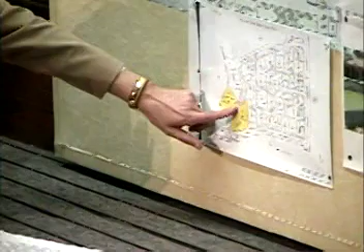Madam Chairman and respected members of the commission, I basically need to point out to you the property. It's kind of interesting, this portion of Camino, there's actually a wash here. This was supposed to be, at one time, a connected roadway, Camino Monte, circling around, Camino Descanso, both exiting on Palm Canyon Drive.

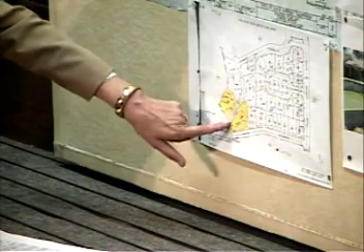But in 1972, that portion over the wash was determined as not buildable, so consequently it was vacated. The applicant is requesting vacation of Camino Monte, the portion right to his property line. That is at 2005 Camino Monte. Basically that is the request, and staff has determined that it is consistent with the general plan since it's not a portion of the circulation element.

Thank you. Any comments from the commission? So there are no other properties that take access from this? He's going to merge these two lots and the street in the middle, and it's not a street anyway.

Yes, the only properties that take access to this property are either properties that Mr. Westman owns or Mr. Ely owns, and they're working together on an overall development plan. The city also takes access across this property for some hillside properties that we own, and we have an easement. The vacation of the right-of-way will not vacate the easement to the public properties, and before we approve the actual vacation, we will require that easements to all the properties be in place so there's no confusion in the future. But no other properties take access, and we've in fact previously vacated a portion of Camino Monte, the part that goes over the wash. We figured that's a pretty tough bridge to build, long time ago.

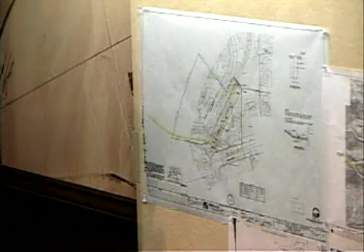So consequently, the applicant has done a surveyed trail. It's an actual metes and bounds description and a legal description that has been forwarded to the city attorney for review. And the city will base our approval upon, as a condition of approval included in your exhibit, at the approval of the city attorney.

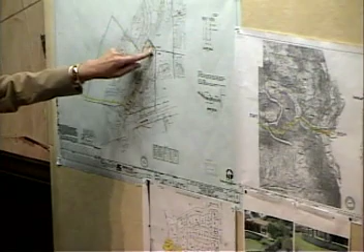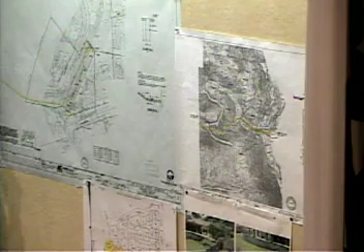This yellow line, this map, is kind of a blow-up of just a small portion of this map. The yellow represents the trail as it proceeds from Camino Monte down into the wash, proceeds up the wash, and then up the hillside, cutting across. You can kind of almost see it follows drainage pattern until it finally accesses the Lykken Trail, the trail that's already built. One portion of the request was that we would have 2 access points.

Currently, we really don't have that. There's only people walking up the road. So consequently, now we're asking that, and this has been determined as the point of access, where there would be some type of trail built down into the wash from Camino Descanso to intercept this trail so there could be access from both points.

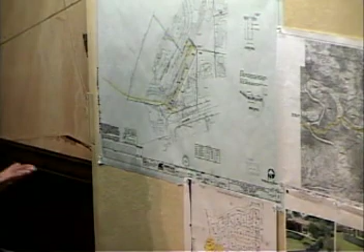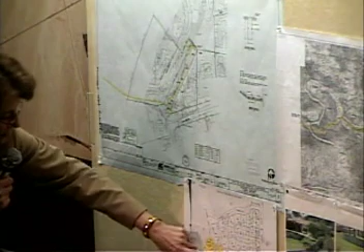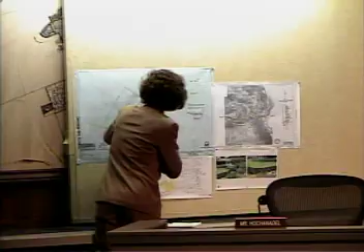Now, another component of this project that is actually the application is to build a retaining wall between 2 adjacent properties, these 2. They both, this is slightly deceptive, they extend, the property line is this solid black line here. And this is Camino Descanso property, Camino Monte property, both owned by the applicant.

There's been a boundary line adjustment to basically move the one property line a little further northwest to allow for a cleaner line here and the trail easement, etc.

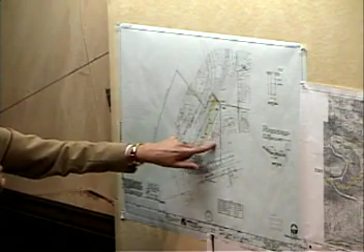The retaining wall request is to provide a fill for a potential development of this lot. That would be the intent. And the adjacent property has done something very similar, right here. I provided this photo exhibit just to clarify what I'm talking about.

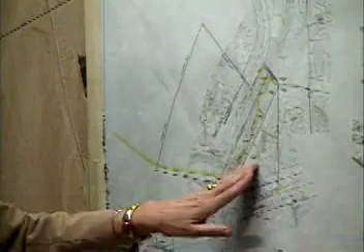This particular property has a non-conforming illegal structure here that's actually in the wash, which would be determined unsafe if there was an actual flood circumstance. So there's an intent to the retaining wall, and it works with the trail easement, the vacation, and the boundary line adjustment.

I've had inquiries from all the neighbors. There's been courtesy letters sent several times regarding this project. The first was sent last May, and then one about a month ago again. I believe a couple of neighbors are here that we've met on site to discuss the actual project, so we could get an idea in the field exactly how this will work.

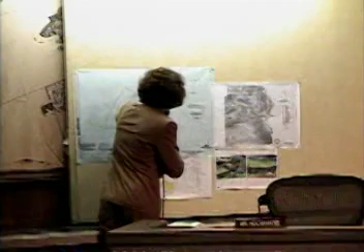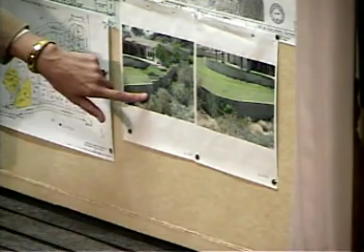The adjacent property owner here was very concerned about the impact to his wall, the aesthetics of the potential fill here, and the structural impact on his wall. The applicant has agreed to lower the proposed wall height by 2 feet where it's actually going to intersect.

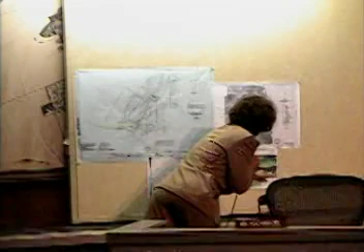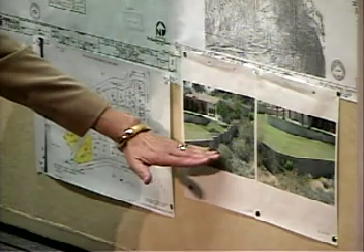It would be like proceeding from what we're seeing here. That would make a nice, clean, adjacent wall, doing basically the same kind of step-up design that's already there. We feel it will also be necessary to maintain the same elevation as far as fill, in order to not create an unstable relationship with a wall that wasn't designed for that.

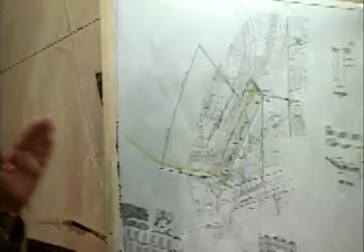Other concerns have come from this property owner, who was definitely concerned about the narrowing of the channel, and what that means hydrologically. We're narrowing a channel, so we're going to have swifter water and not necessarily enough... well, the applicant has a hydrology study that was conducted on behalf of the city.

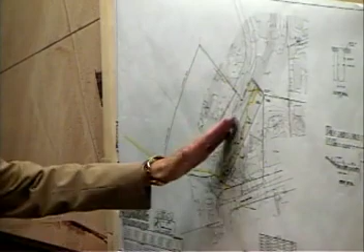That study has indicated a riprap would be necessary on the north and west side of the channel to protect it, and that also acts as a slowing mechanism when you do have a water current through there. Then the water would pool here, and it was determined by that professional review that the impact to any downflow properties was negligible. So staff has relied upon that professional opinion.

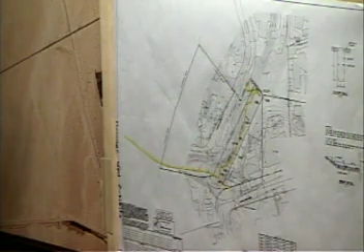I think there's one more neighbor. This particular neighbor does have concerns with the access and people parking, etc. How are they going to handle that, what's going to happen there? Right now, it's kind of like a little unimproved trail.

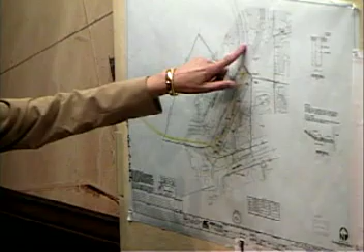People just scooch down the side of the wash if they want to walk from the adjacent neighborhood and go down, but most of the traffic comes up this way. There's enough right-of-way, and in talking with this neighbor, there's not much concern regarding a few vehicles parked in the right-of-way there. So that's something to think about, and we'll see if someone here wants to speak to that concern.

I think that concludes my report, and I certainly welcome any of your questions.

Thank you. Any commission comments? Yeah, I know. Okay. Yes.

If I could just make a couple of comments on the conditions of approval, just taking a look at them. Condition number 9, we'd like to change the last word from city attorney to city council. The council will have to approve that agreement. The city attorney will review it, but the council actually approves that type of document.

And then number 10, I think we need to also add to that, and say that condition deals with trail construction preceding the wall construction. We'd also be concerned that the trail be constructed prior to the final vacation of the roadway, so that the trail's in place and we don't end up with a period of time where there's no trail or public access through that area.

Okay, thank you. And those types of details we can work out in the trail construction agreement. So these just set the stage for actually how we memorialize it, and then how the council would actually approve the agreement. I see that the applicant is in the audience.

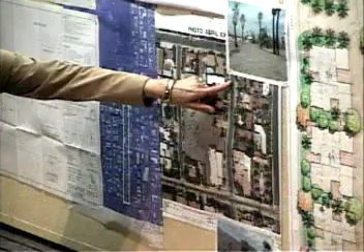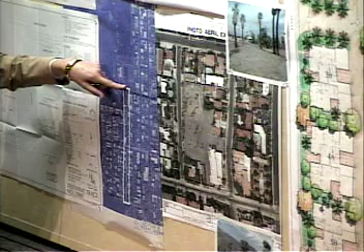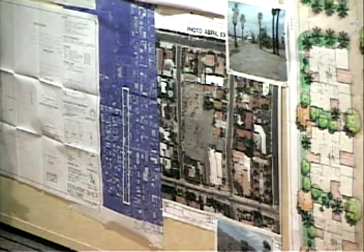The existing right-of-way, or existing roadway, is a collector status roadway on the circulation element of our general plan. That basically represents a street section that we've provided as an exhibit with a 60-foot wide right-of-way. The city maintains 60 feet of that area. If you so choose to amend that general plan circulation element and delete that designation of a collector, it would change the roadway status to a local roadway. That represents a 50-foot wide right-of-way that the city maintains.

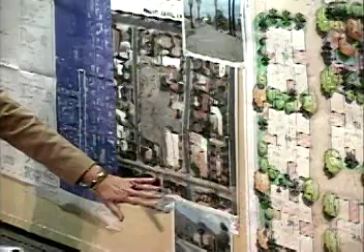This particular roadway is kind of well defined. I wish I had this for the entire length that we're proposing, because it certainly gives you the true idea of how this street actually exists. There's bay parking, there's some sidewalk, sometimes there's not a sidewalk. It's a very eclectic neighborhood in that respect. It's a historic neighborhood. Most of the structures have been there for quite some time. There has been infill development that has occurred.

But basically, I've detailed it in the staff report exactly block by block how this proceeds, but hopefully that would give you kind of a general overview of the roadway.

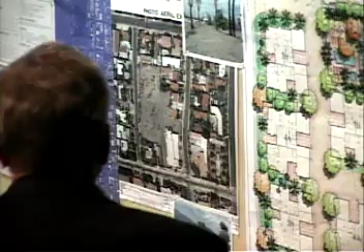We have received a letter from the Historic Neighborhood Association that was included with your documents on the table today, since it came in after the staff report was sent out to you. It includes the entire Historic Neighborhood Association's support for this general plan amendment. I think it would be best if I just addressed your questions now, but first a very brief overview.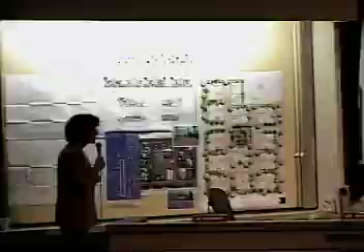Kathy, what's the actual width of the roadway as it exists? It's a mishmash, I know. Right now there's 40 feet on Cahuilla, I think I included that. Off the top of my head, I honestly can't tell you for the other blocks, but I know it's included here.

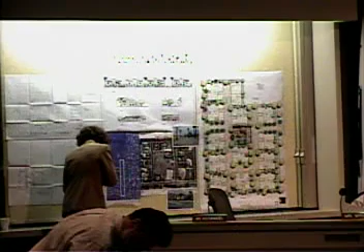South from Tahquitz Canyon Road, there's an existing right-of-way of 50 feet, and it indicates a 60-foot right-of-way road width, so it exists at 50. Then going down to Cahuilla Road and south to Baristo, it's a 66-foot right-of-way, but we know from the plan that there's basically about a 50-foot right-of-way and 40 feet approximately of pavement, probably a little bit more. As we proceed further south, there's a reduced half-street width on the west side of Cahuilla Road from Monte Vista south. So it's 66 feet, then it narrows slightly on one side of the road on this block — you can almost see it if you look at the old aerial. So that's a quick overview.

I guess the reality, though, is that for most of the length of that, it doesn't meet the actual condition as a collector street anyway. No, okay, that's exactly true.

In the proposal, are there any traffic calming provisions included? Because right now that's like the secondary thoroughfare as people move north to south across that side of town. If I could answer that question, the traffic calming program is done by Dave Barakian. Really, there isn't any traffic calming included with this proposal.

However, as part of the council-approved plan and meetings with the neighborhood, there is currently traffic calming going in on that street in the form of what they call speed cushions. We have three streets they're going in on right now. They haven't actually gotten to Cahuilla yet, but within a few days they will.

What are speed cushions? A cushion's not a cushion, is it? Speed cushions are made out of rubber and bolted to the pavement. They go up about 3 inches and cause traffic to slow down — like a hump made out of rubber bolted to the pavement. We've had them for some time, on Ramon Road west of Palm Canyon, and we just put them in on Cerritos south of Vista Chino.

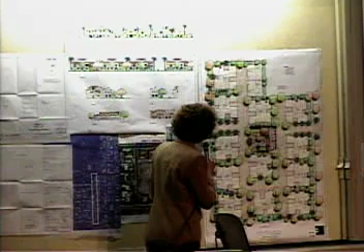Mr. Chairman and members of the commission, I want to give you the general layout of the project. It consists of 12... 3-unit complexes.

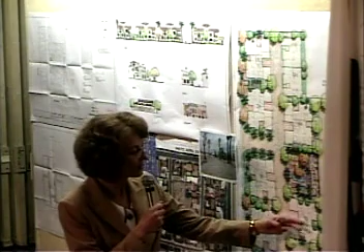Excuse me—right, shorten the staff report. I can't get over to mine—and one duplex. Each of these triplex units consists of 2 bungalows and an upper carriage unit. They're 2-story with one 3rd-story element. We'll show you the elevations on another board. I had so many exhibits I couldn't provide them all on one board. And there's a central recreation area provided for all units.

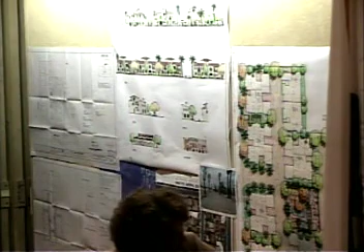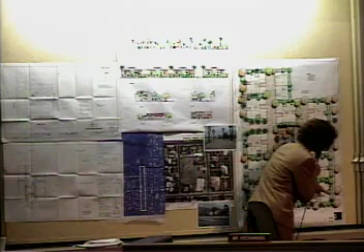Just to go across it, this is a view of the project from Cahuilla. There will be bay parking proposed here. The count is not going towards this project, but it will be completed in conjunction with it because it's obviously part of this site, physically associated with it. There will be a low wall along there to protect the properties from headlights. Originally it wasn't proposed with a wall, but it was needed because of the bay parking.

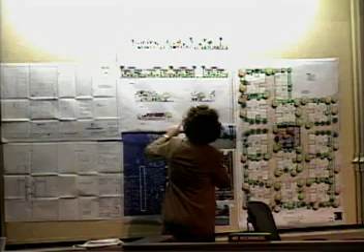This is the design—the top design is a streetscape from Baristo. You can see there's a lot of variety, a multi-tiered project, multi-dimensional in many ways, both as you face the project and obviously in height. This project has gone before both design review and the neighborhood group twice.

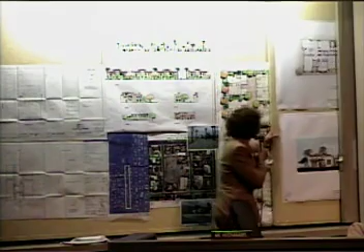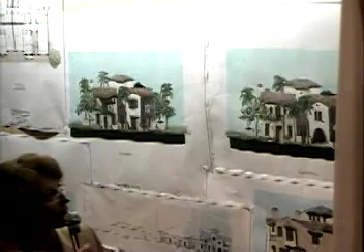Design review saw it for both a single-story element and a multi-story element. This represents the multi-story component of the triplex. You can see the element here in the middle that is, I believe, 34 feet in height, and the other also 34. Then we have a 10-foot plate height, 9 foot and 9 foot here.

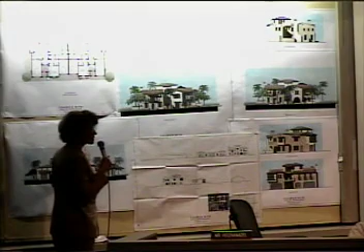In response to concerns at our neighborhood meetings, it was very well received architecturally at design review. There were absolutely no conditions of approval associated with this particular architectural design. The neighbors' meeting was very well attended, with, I think, almost every adjacent property owner present, perhaps with the exception of one. I'm bringing this out so we can look at something here in relation to it.

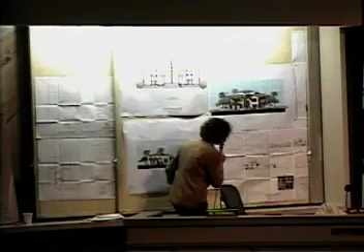We wanted to talk about aesthetics, views, adjacent single-family residences, and the relationship to a multi-story complex. So the developer chose to change a tri-unit here to a single-story duplex there, so the single-story components here and back here wouldn't have such an impact and would still have view corridors. Those are expressed in some of these sections, A to A here and B to B, with B representing the north, which is a small single-story apartment complex, and how they would perceive the project adjacent to them.

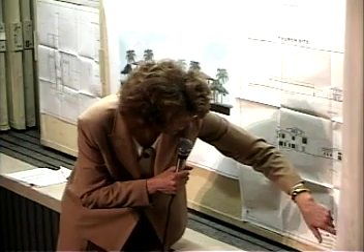And then we have our single-story, single-family homes here, and how they would perceive the project. This is the property line, their backyard, etc.

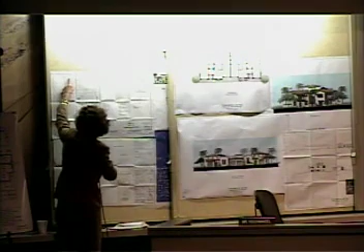In response to neighbor concerns, the applicant also chose to reverse only one structure to make the design actually work for the properties on the other side. This is a small resort hotel who are very concerned about the ability of people to see down into their development, especially off of a deck or courtyard.

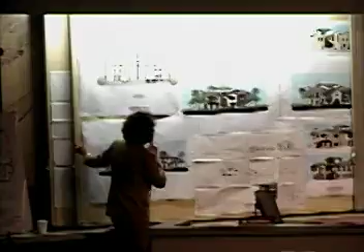I'm going to point that out really quick. So by flipping the project, this is what we get. They're really not seeing down from the decking space, etc. So that was in response to neighbor concerns.

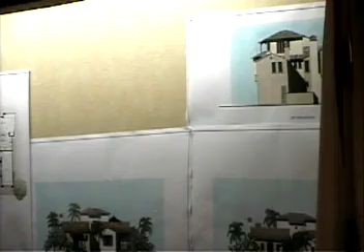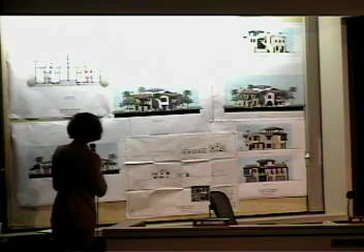I should say that obviously this is a planned development. It does depart from specific zoning standards of development in height, in setbacks, in parking, and distance between structures. That's been outlined in your packet. If you have any questions in regards to the project, I'll certainly entertain those. That concludes my staff report.

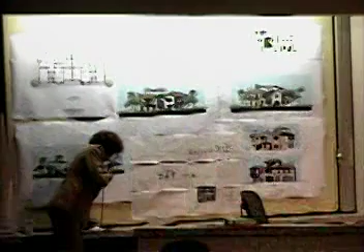Mr. Chairman, let me interrupt for a second. I have to ask the applicant directly. I have no conflict with Mr. Westman, but on these drawings it says Westman GHA. I have a conflict in another city, and it's just until these drawings were pulled out. I need to know whether it's Westman Development or if it is GHA. If it's GHA, I should have drawn a marble.

Actually, this is going to be a GHA project. It's totally controlled by me, but I'm in discussions with Mario to joint venture this project with him. Because sometimes things have been here as Westman GHA, and GHA really wasn't involved. Now tell me what you want to do. You don't have a deal with GHA yet. Okay.

Yes sir, it's really your discretion, Mr. Matthews. There's a potential conflict if that business relationship ever occurs. If you're uncomfortable with that relationship, you can abstain. If that were the case, we would bring the other commissioners in, we would draw marbles, and then move on. I can't tell you if you do or you don't. Out of an abundance of caution, you may want to abstain. Yeah, I'm sort of an abundance of caution guy, and my arrangement with GHA is already done. But I was involved in a business transaction with GHA in another city, and so.

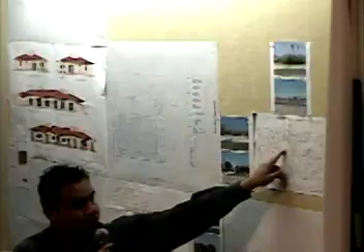Staff report. Thank you, Chairman and Commissioners. The location of this 4-unit apartment complex being proposed is just south of Ramon, this highlighted area here, east of El Vida Avenue and west of El Placer. It's currently vacant land, as you see, kind of in the neighborhood across the street from the Fat Burger and the airport car wash.

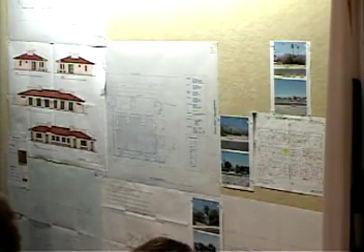The roof material, we have an S-tile blend here. And then here we have a stucco color, Scotch stone, and the accent color will be a chili pepper, and the trim will be a gray.

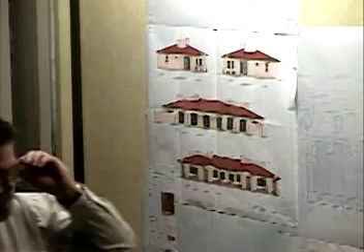You guys are both okay. Yeah, the lots are 120 feet wide.

Have you finished your staff report? Yes, I am concluded. The applicant is present and would wish to comment on the conditions.

Any questions of staff before we ask the applicant to address the commission? What was design review's comment? Design review's comment was to continue the banding around the porch here, and continue the roof line, or the applicant is stating that he'll be deleting this gray area here. That was it, approved as submitted. Oh, and a revised landscape plan.

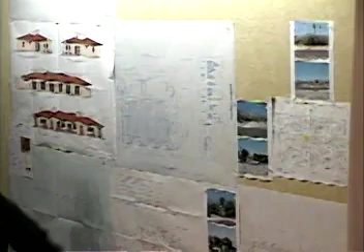And where's the parking for this fourplex? It's bay parking on Calle de Ricardo, and it'll be decorative paving, and it does meet the parking requirement. So they've got covered bay parking? No, not covered. Code does not require apartment buildings to have covered parking, but there will be trees next to it, so there will be some shading, and it will be decorative paving.

Any other questions? The applicant wishes to address the commission? Come forward please, give us your name and address, and sign the clipboard when you're done. Mr. Chairman and members of the commission, my name is Imad Gurgis. I live at 2510 San Mateo Circle.

I assisted the owner in preparing the application, and he asked me to comment on a couple of items, summarized under engineering items 2, 3, and 4, where the city engineer asked the applicant to dedicate a 2-foot easement. We talked to Mr. Barakian yesterday, and we suggested that we put in a rolled curb along Ricardo instead of a depressed driveway. He agreed with that, I think, and we just would like to put that on the record as our concern.

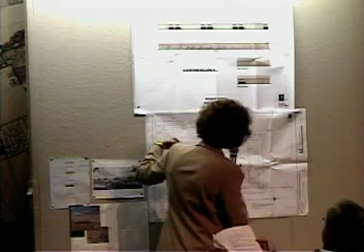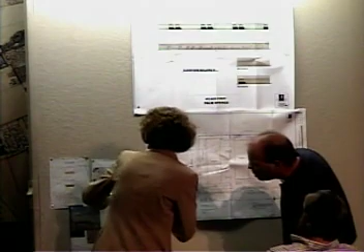Mr. Chairman and respected members of the commission, this is an application we've been entertaining for quite some time. The applicant has revised plans at our request. The building was changed where it actually faces the interior with bay parking when, at our request, we realized that the scenic corridor of Highway 111, or I-10 on the south, would impact this highly visible site. This is a quick 3D view from the south and east corner of what you'd probably be seeing from I-10 now.

They've made a real effort in doing this. I had colored site plans, but because it's been revised, we've chosen not to put this colored up. These are very large structures—you can see 47,880 square feet, 41,040.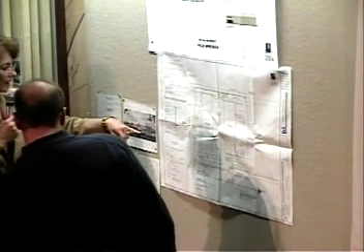It's a right-by-zone project, complies with our zoning ordinance. It's gone through design review. They were asked for two changes, one regarding awnings, and they've done that. The support for the awning will just be steel, very plain, very simple, that would comply with the building, and also to make the parapet level. They had a multi-level parapet. If you have any questions, I'll be pleased to answer those.

Excuse me, it's McLean and Orr. This is actually here, 20th—it's coming in here, yeah, on the north side of the freeway. Right, this is the Orr Industrial Park.

Mr. Chairman? Yes, Mr. Evans. Just a quick comment—this is a project where I think we all started off with a feeling the project had a little bit different orientation. When we sat down with the applicant, we worked with them to flip the building around. They've been very cooperative. There are a couple of areas, so the applicant understands, that as we get into final plans and the final landscape plan, some perimeter walls need some design attention. There are some planters that are going to be needed. The wall facing Indian Canyon needs some finesse, but I think the building was well received by design review.

It will provide an outstanding land use opportunity up there and really be the first building fronting on Interstate 10. But the landscaping is going to take a little bit of effort. We're just going to encourage the applicant to get a good desert landscape architect so that we put in materials that will actually grow in the harsh conditions of this site and create a real nice showcase appearance for Interstate 10. We do recommend approval.

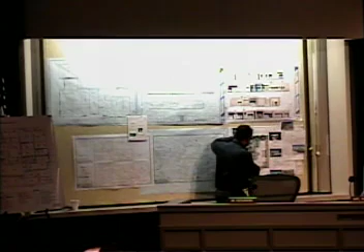Thank you, Chairman and Commissioners. The location of this project is basically at the end of Ramon. It's on a corner lot, Ramon and Camino Calidad. They will have access from Camino Calidad, and that's their front yard. This picture is the view they're looking at from the pool out towards the mountains. These are the 2 neighbors in the rear, and this is the neighbor on this side of his yard.

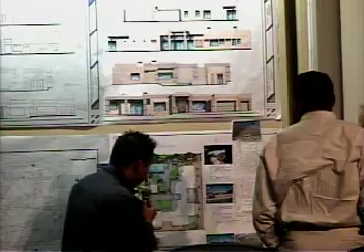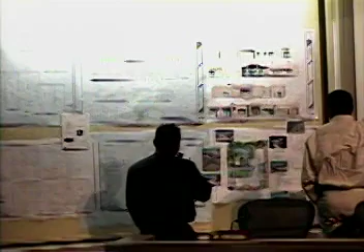The applicant does meet setback requirements, and the height of the building is 18 feet - it's not going higher than that. He is asking for a 20-foot front yard setback, and an AMM will be required for that.

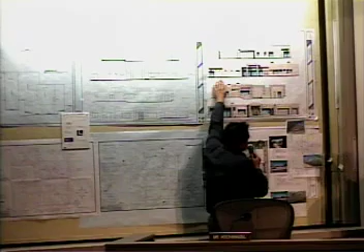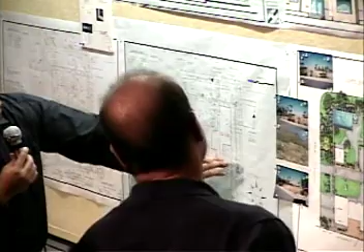We have worked with the applicant on the rear massing. What you see here is his original submittal, and he has kind of broken it up. So this part of the backyard is moved over - he's moved basically the whole building over, so he won't be impeding into his neighbors' views as much.

I did send a notice. No one from the neighborhood came and looked at the plans. I did go out in the field this morning and talk to one of the neighbors, and he is aware that this building is going up.

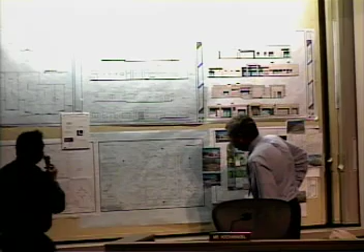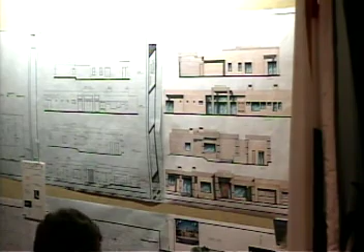Another thing they did is the roof plan - notice how in the rear elevation here, it's a straight plane all the way across. So they've lowered the massing to give the rear neighbors more view towards these beautiful mountains over here. Any other questions? That concludes my presentation.

But did Design Review have any comments on it? Design Review liked the project - it's a good design. The only comment was moving the home away from the rear, and the applicant complied with that. Thank you.

Did you talk to the homeowner that is affected by that rear? Yes, I spoke with one of them this morning, and he's aware. They're okay?

I guess they recently bought the property, and they're aware that sooner or later it will be developed. There was a story pole out there, even though it was leaning and not quite the height it should be, but it indicated where the home will be going, and they were aware of that.

Are rear yard setbacks met? The minimum is 15 feet. I think they're at 22 feet. So they're within the height restriction? Correct. Any other comments? So they're within the height restriction for the building, but what's the pad height compared to the neighboring properties?

Between pad heights, it's about 7 feet from one neighbor to the other. The neighbor to the east is down 7 feet.